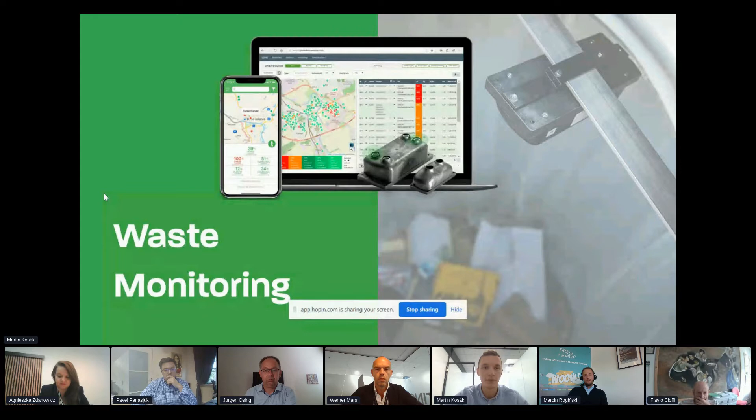So coming back to the first solution, the company started with smart sensors based on ultrasound that send data through IoT and different networks to a software platform, where you can see fill level capacity in real time. The best example we always explain is a textile waste collector in Slovakia, which has 1,300 bins all over the country. Out of them, 600 are equipped and monitored with our smart sensors, and this waste collector collects 3 million kilograms, imagine the volume of textile.

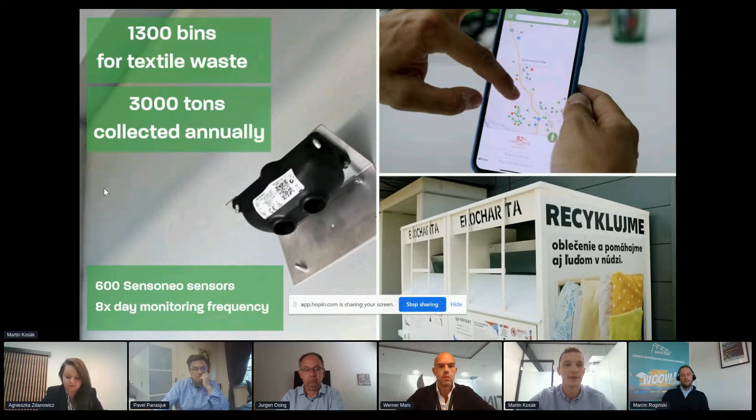So this is kind of a circular economy solution because the textile is coming back to the market, right? What our solution brought to this customer is that collection costs decreased by 20%, because now they don't need to drive every single kilometer, only when the container is really full. And imagine those trucks, the demand on fuel is much higher than our cars, so every single kilometer saved is helping.

They also save time, because before, the drivers were driving the whole day, and now they finish at 2 or 3 p.m., when they can see the red dots and the containers they need to collect. All the planning and logistics is much smoother than before, and the return on investment was only 7 months.

Another solution is a take-back system or reverse logistics solution. I always explain it with this example, a nationwide collector of e-waste in Czech Republic. Just look at these numbers: more than 20,000 collection points. So it's not only bins, but you can put your e-waste back also in electronics shops, malls, or wherever. More than 20,000 collection points, more than 13,000 users, more than 4,000 of these bins, and there are a huge number of processes going on every day.

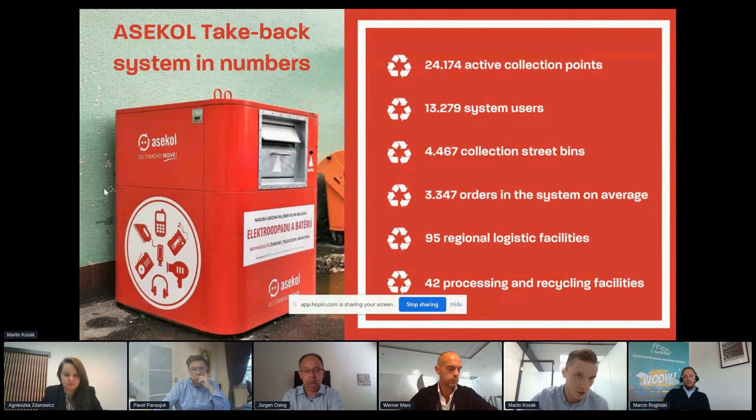The higher evolution of a take-back system is a deposit return scheme, something done on a nationwide and government level. Many people imagine a deposit return system only as a reverse vending machine where you throw in the bottle and get your voucher back, 15 cents, or 25 cents in Germany. But there are many more stakeholders in the whole system, imagine producers like Pepsi and Coca-Cola, retailers like Tesco or Lidl, and you need to gather all these stakeholders into one single system somehow.

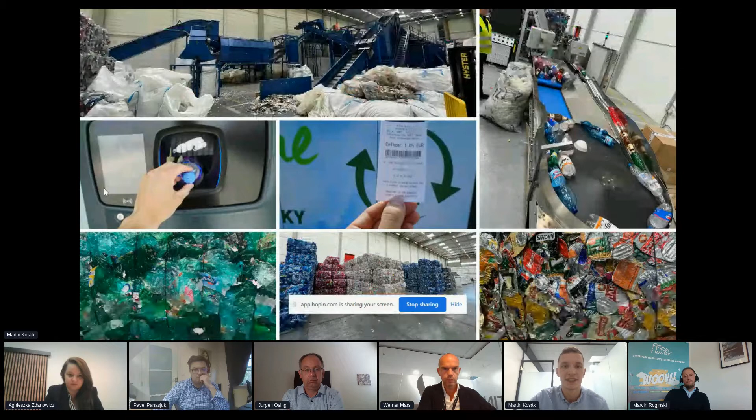Basically, that's what we do, and what we have done in Slovakia. Here are some pictures from the recycling facilities, and here are some numbers from the 1st of January, when the system was implemented, until the middle of September. More than 3,000 different barcodes and bottles need to be in the system, more than 2,900 collection points where you can return your bottles, and the whole process took only 10 months to implement.

There are, on average, 3.5 million returns every day, and the number is still rising. This is the biggest thing you can achieve in the digitalization of waste management, and we are the only company doing it in more countries. We have won the tender in Malta, also the tender for the first phase in Romania, and we are active in Hungary, Portugal, and Ireland. Right now, there are still about 10 countries in the European Union that don't have a DRS. Poland is one of them, so we will certainly try to get into the tender in Poland as well.

And the last slide, just to talk about the opportunities and barriers and challenges. So we think that proper tracing and accurate data is one of the opportunities, because this is something that can be improved, and every innovation that is improving circularity and recycling is definitely helping, and needs to fine-tune the recycling of materials.

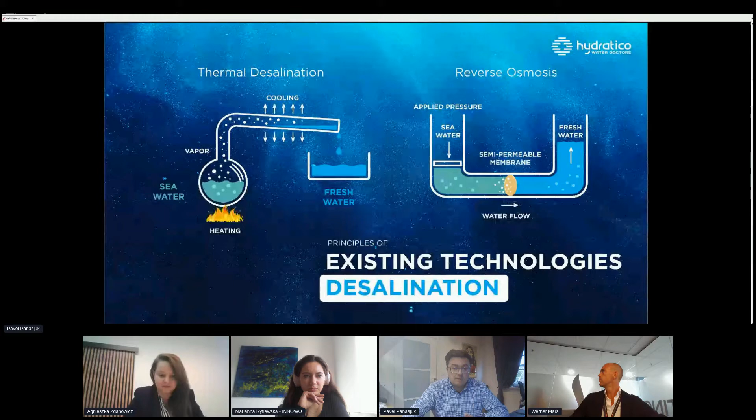Today, most fresh water is produced using two desalination methods: thermal desalination and reverse osmosis. However, these methods have several problems which negatively impact the environment. First, they use large amounts of fuel as the main source of energy, and they emit a lot of CO2. By mid-century, CO2 emissions directly related to water desalination would be over 200 million tons. Also, the salt brine is poured back into the sea, where it raises the water temperature and has a devastating effect on the marine ecosystem.

So what we have developed is called supercavitation, a new approach to desalination. Supercavitation is a hydrodynamic evaporation method with the largest steam uptake per square meter of evaporation surface. Here's how it works: the technology uses a supercavitation bubble, up to 1 meter long, which significantly increases the degree of evaporation compared to traditional methods.

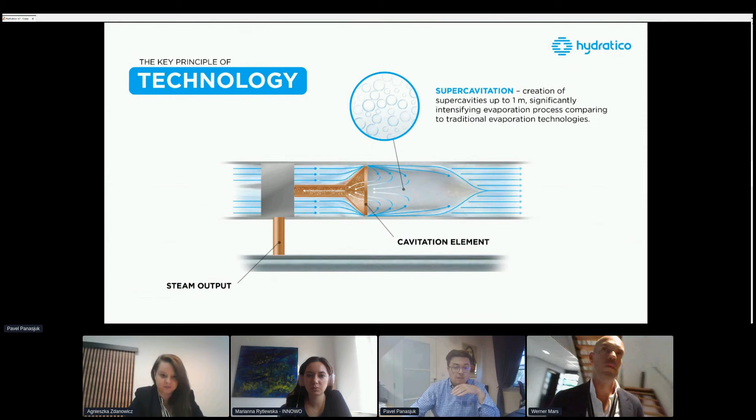We are currently testing our prototype with a total production capacity of 5 cubic meters per hour — that's 5 tons of clean water per hour. This technology was already used to clean wastewater from petrochemical production, and we also successfully applied it to communal wastewater treatment. Comparing it to the two most popular technologies, reverse osmosis and thermal desalination, we see that through supercavitation we were able to produce much more drinking water from the same amount of seawater.

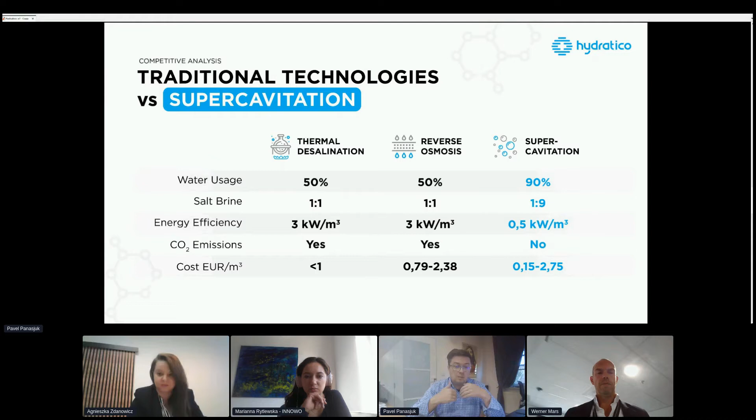We are able to produce much less brine, using much less energy, which means we can power these units using renewable energy sources such as wind and sun — producing drinking water not only in an ecological way, but also much cheaper.

We plan to deploy it where it's needed most, using mobile desalination units of different capacity. Hydratico has already designed 3 desalination units for 1, 10, and 100 cubic meters per hour. First sales are planned for 2024, but we already have commercial agreements for testing and validation of this technology in real-life environments.

As you can imagine, the global desalination equipment market is growing rapidly. Data show an increase to over $11 billion by 2026, meaning an annual growth of 9.5%.

Key markets are, of course, the Middle East and Africa, and this is where we are active. Key drivers there are the scarcity of water resources, growing population, and progressing industrialization. Surprisingly, COVID is also a major factor because it increased the consumption of water a lot, and also production of wastewater. These are the factors which drive the demand for water equipment.

We plan to focus on these segments as our markets. First is mobile desalination units that can be installed locally without being connected to existing water infrastructure. Then we have mine water treatment, an extremely big problem especially in areas with intensive mining or chemical activities — this is south of Poland, for example.

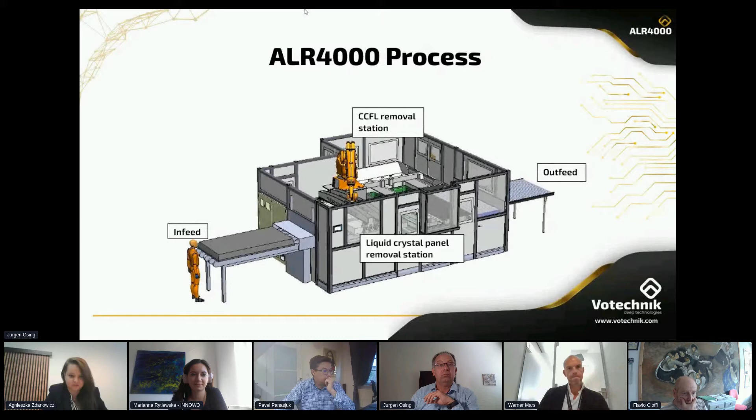So, the output fractions, let's jump in, are the CCFL tubes that are isolated and treated separately and removed from the whole process, so they're not contaminating your downstream fractions. The liquid crystal panels and the display shell with the metal and plastic that is valuable for further processing can be shredded, tumbled, or manually dismantled.

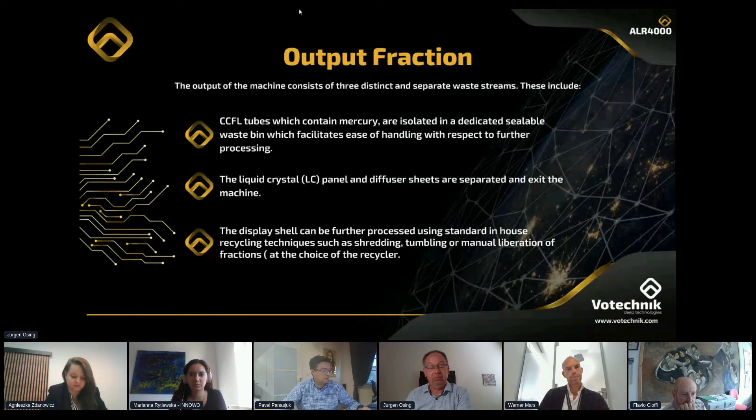So just to summarize the benefits for an operator: it's a substantial return on investment opportunity. Our partner KMK in Ireland, for instance, had a huge cost to export LCD televisions abroad. Now they're keeping this in-house, they're saving on transport costs, reducing carbon footprint, and now have actually an income from the recyclable materials that can be extracted. So it's a win-win for everyone.

The upfront costs to an operator can be minimal, as we are offering a leasing model. So that opens up this technology to a large range of operators that might not be able to afford it otherwise. We are supporting the machine with an integrated SLA contract, so the operational risk is with us, not the operator, and it's a true plug-and-play machine. It can be employed on site within days and be fully operational very quickly. It's tested to the highest standards, and we'd be delighted to tell you more about it.

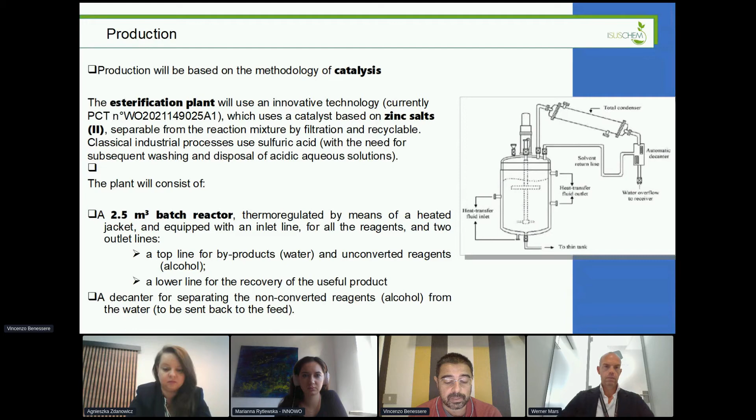This is the esterification plant that we built in Caserta, nearby Naples, and this esterification plant will be active at the end of this month, or at least at the beginning of November.

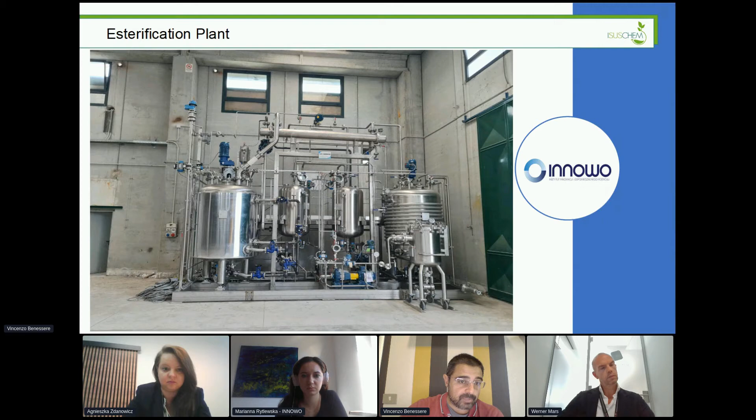In addition, an important energy saving is obtained by significantly improving the production conditions of the base paints, because, again thanks to the surprising solvent capacity, the process can be carried out at a lower temperature and with significantly shorter production times.

In cosmetics, it is always possible to formulate innovative products not currently present on the market. For example, in hair treatment for fixing color pigments, and in the sunscreen sector, where the esters produced have given very interesting preliminary results as innovative solvents for active principles that are difficult to dissolve with products available nowadays.

It's also interesting to have a look at the oleochemical market, in which we enter as a small but dynamic player. It is certainly a strongly driven growth market in the sector of the use of oil biomass, but currently the fraction of fatty acid mostly used is the medium-long chain. Thanks to new products and new applications, the medium-short fractions are also enjoying success and represent an opportunity in the immediate future. Our products are not only improvements of those existing in printing inks and cosmetics, but also open up new application possibilities, going beyond the current use of medium-short chain fatty acids only in perfumes or herbicides.

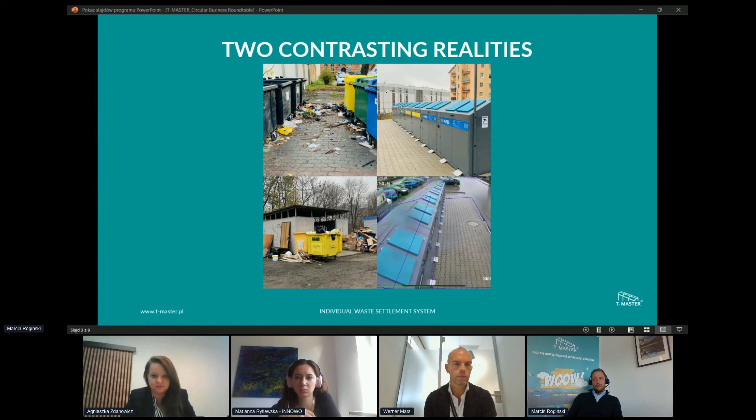It is the only solution on the market that allows you to assign to a household the correct quantity and quality of selectively collected waste, and it makes it possible to pay for every kilogram of waste produced by residents. In other words, this is a waste counter, and as you can see, it can be compared in this way to an electricity, water, and gas meter.

Okay, these are basic technical details of the devices: solid metal body, container fullness sensors, the floor of the container is a scale, CCTV cameras with litter detection system, photovoltaic or 230V power supply, possibility to divide one module into 2 sections. Then you can use one module for 2 different fractions, automatic lids, voice announcements, and what is very important, the devices are modular, so can be set in various configurations.

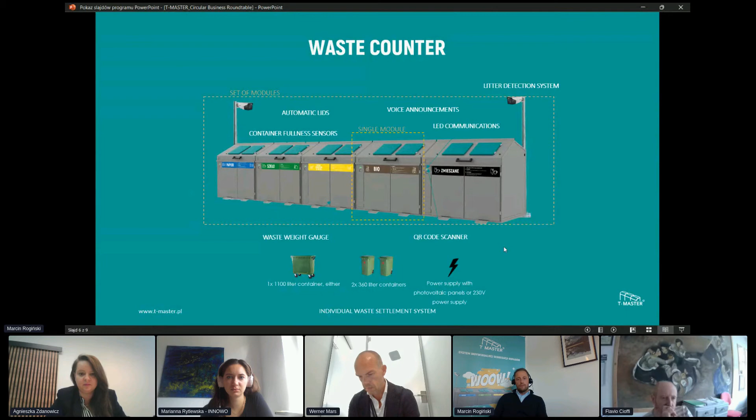So if you need an innovative solution for waste management, for example in your municipality or in your country, we look forward to working with you. And I can say with full confidence that we are the IT technology leader in waste management in Poland. But we are a very ambitious company. We know that we have a world-class product, so we are ready to go abroad, ready to go into foreign markets as well.

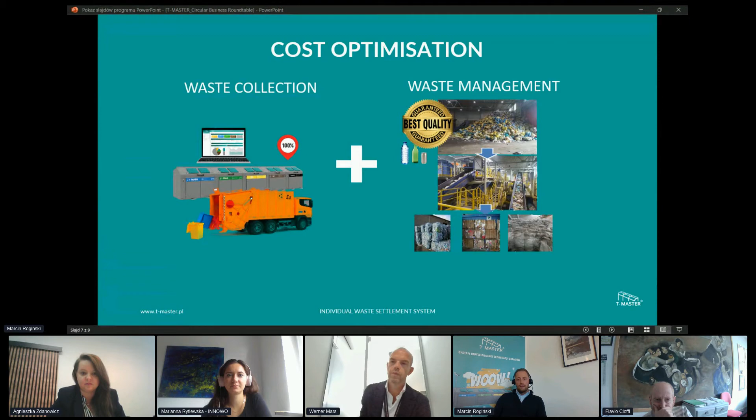And the last thing I want to point out is the pay-as-you-throw method, because we believe at T-Master that the pay-as-you-throw method is the most fair way of settling payments for waste collection and management. At the moment, in Poland, only T-Master - and I believe in Europe and some other places - only T-Master technology allows a resident to be billed using the pay-as-you-throw method. This is possible thanks to legalized measurement of waste weight, control of waste segregation, and assignment of each kilogram of waste to the correct household.

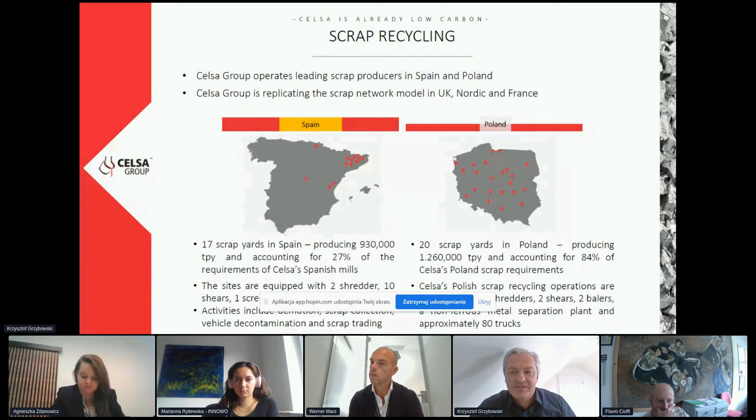We also process the scrap at our premises, and as you saw, we are facing the issue of wastes that should be processed, byproducts of the scrap processing. As you may have noted, we buy more volume of scrap than we actually produce steel from. The difference mostly comes from impurities present there, like wood and rocks, but in more prevailing amount, these are the plastics and rubbers that require processing.

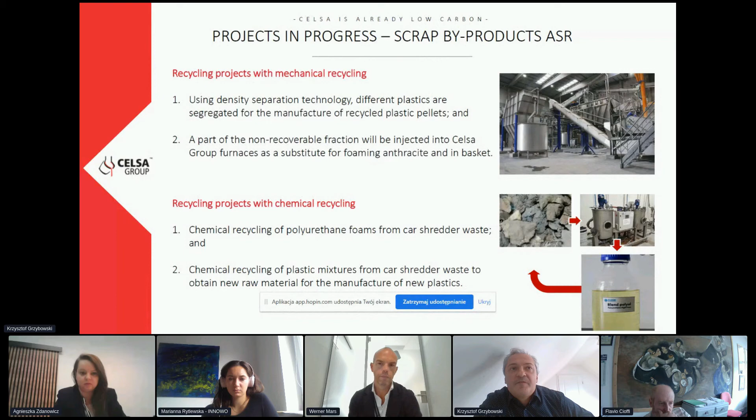We are developing at our premises a system to classify these plastics by weight and by type, and also to process those that are difficult to process in the form of a potential RDF, or fuel for our electric arc furnace processing the steel, but also to depolymerize and recently to gasify it, to get a more convenient form for further processing.

We also started to investigate e-waste. E-waste was also present in our scrap, and initially, a few years ago, we were just segregating it out and classifying it. But now we are intensifying our actions to utilize our scale and means, and considering the scrapyards I mentioned, to get a bigger stream of this waste and process it better.

We have also been present for many years in end-of-life vehicle treatment, and we are now redirecting our activities to be able to process electric vehicles, since our technology is mostly prepared for traditional car treatment. Now we have to face some new wastes in the form of batteries, and also the more sophisticated construction of these electric vehicles.

I don't want to go more into the details of how we process our wastes, but if you are interested we can discuss that. At this moment, I would like to finish this presentation with a closing comment: as a steel producer, but also waste processor in Poland and Europe, we are looking for potential partners who could help us address these problems I highlighted here, but also maybe extend our business model with processing of new wastes that could be easily done considering our current activities. So thank you very much.